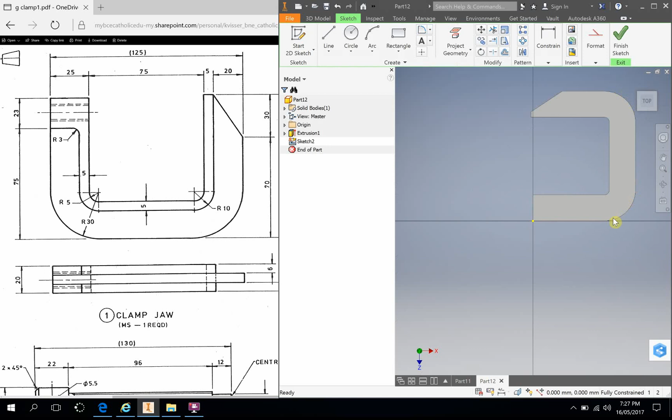So to start off, I'm just going to select that face and start a new sketch. And if I bring this over, what I might do is work in full screen so you've got a better view.

What I'll start off by doing is, with this here, I'm going to use a thing called projected geometry. So if I select that, I can click certain lines that I'd like to offset backwards. So I don't want to do the whole thing, don't click on the surface, just click on the lines you want to do.

So let's start off by just doing that line there, our internal fillet, and this line here. Now it's important, guys, that you don't do too many lines, so I don't need to offset that line yet. We'll just do this outside row to begin with, and we won't worry about the other little 23 by 25 block that's here.

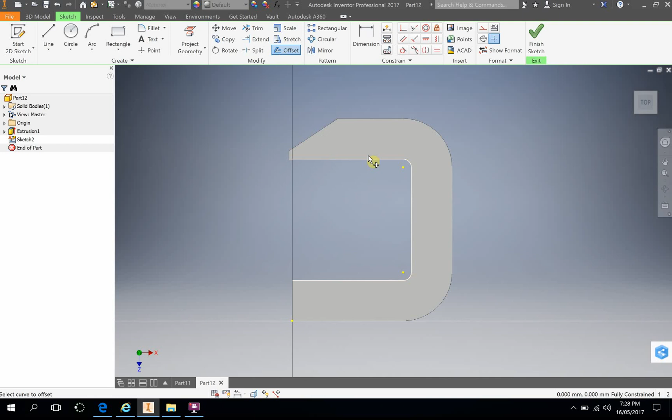So I'm going to start off and just go with my offset, which is here, and if I select that now, after doing the projected geometry, I should be able to type in 5 and click my little button here. If I flip this around, I just highlighted there, and we'll minimize this so we can see we've just done that 5mm part there.

If I was to try and close this shape, I need to draw from there to there, and it looks like from there to there, and I'm just going to quickly do that now. And I'll do another line from here to here.

Okay, I'm going to see if I can extrude this. This line here, I might need to delete it. I'm going to leave it in, hoping it actually causes a problem so you can see how to fix it. So I'll go finish sketch, and we'll go create and extrude. Oh, it is working. If that line caused a problem, simply delete it. So we know here that we need to go 6mm, so we'll change this to 6, and I'll click OK.

Right-o. I'm now going to select this surface again, and I'm going to go create sketch. You might be wondering why I didn't just project that line across as well to begin with and do this all in one extrude. The truth is that when I tried this before I started filming, I had a few problems with doing multiple offsets and multiple geometry commands all at once. So I found it way easier just to do this part, which is what we're trying to achieve.

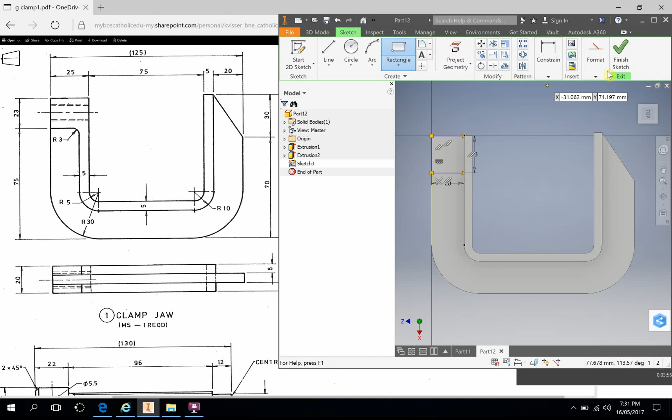That was a 5. By offsetting at 5, that turned into a 10. It all works sweet. Here I'm just going to go rectangle, click that corner, and I need it to go down 23, and I can just go tab, and that one is going to be 20, and there's the rectangle that I want. Finish sketch, extrude, that's going to be 6mm, done.

So I now have that surface there. The only thing that is missing is an internal fillet and the other side of it. So let's go fillet.

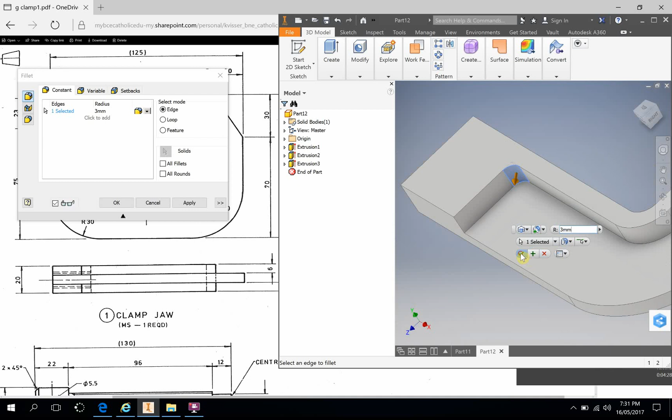We want that fillet to be 3mm radius. I'm going to zoom in and select that edge, and it's going to do it for me just like that. So the next thing I need to do now is to mirror this shape.

That's going to be pretty easy. I'm going to rotate it so I've got the surface that I want to mirror from. So that's going to be my center line, this surface here, and it's under pattern at the moment, and there's mirror. Let's see what options we've got.

So we've got features. Sometimes you can mirror just one extrusion if you wanted to, so you could say I just want to mirror that extrusion, not the whole thing. We want to do the whole thing, so we'll click on this, and now it appears that everything's been selected, which is great.

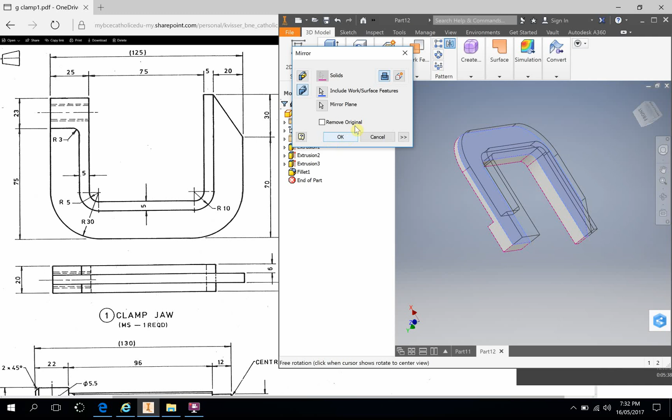Now the mirror plane, like I said before, that's going to be the center. So if I select that line, it's going to give me an example of what it's going to look like. From here, I can ask it to remove the one that I started with. You don't have to do that for this job, but you might want to. And it's going to join it, which is cool, and I'll just click OK. So that was pretty simple.

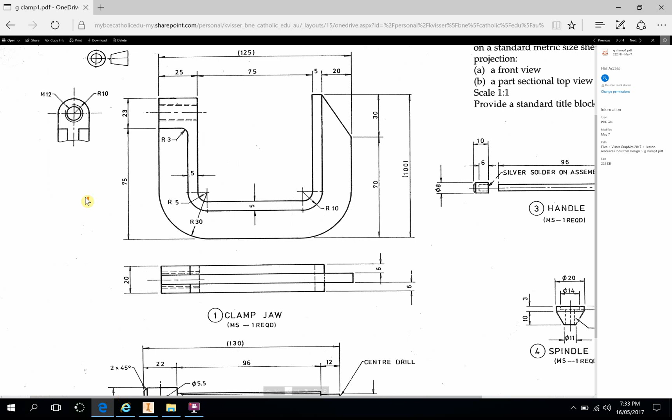That's pretty much my jaw done now. All you're going to need to do now, guys, is put a hole in here and a thread. I won't bother demonstrating that because you should know how to do that already. I will, however, come over here and just have a look at this dimension here to make sure we're not going to run into any problems.

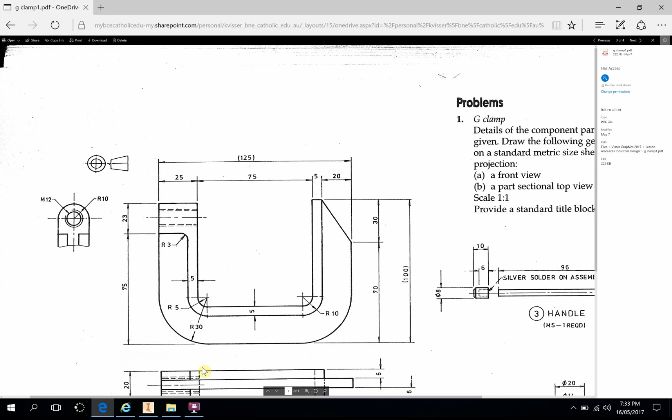So we need to put a radius on it, on the outside edge. I didn't think of that, so maybe I will quickly do this. It's going to be a 10 mil fillet on the outside edge, and a 12 mil hole, centralized, and because there's no other measurements, it's going to be in the middle of this distance here, which is 23. So I might pause the video, quickly do that, and then come back.

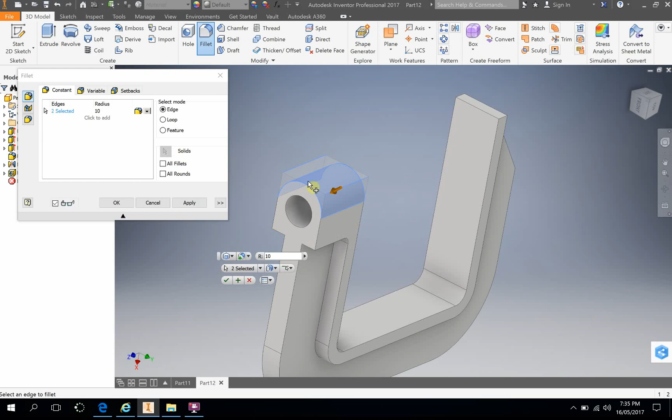Rightio, so there's my 10 mil radius. I'll quickly just show you how I've done this. Fairly simple, guys. If you select the edges you'd like to fillet, there's a shortcut there, or I can come up to fillet. Now I've already put in that I wanted a 10, so it's worked quite well, 10 and 10. I'll click OK. There's my radius there.

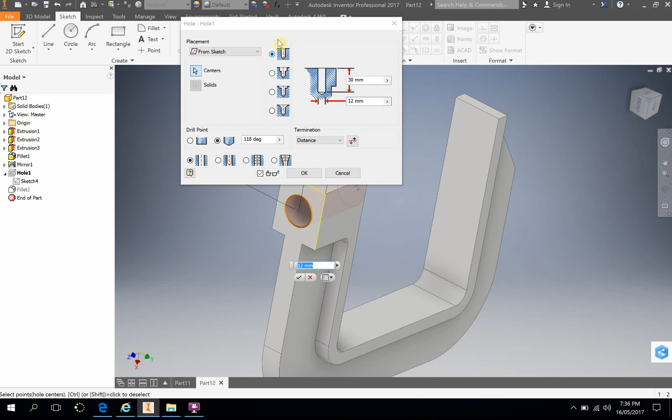To get that hole, all I simply did was I went to sketch. I actually used the little point feature again, and then I clicked on hole, and on that hole I went 30 mil just to get through it, with a diameter 12 for my thread, and clicked on this little thing here that makes it go all the way through. Pretty easy.

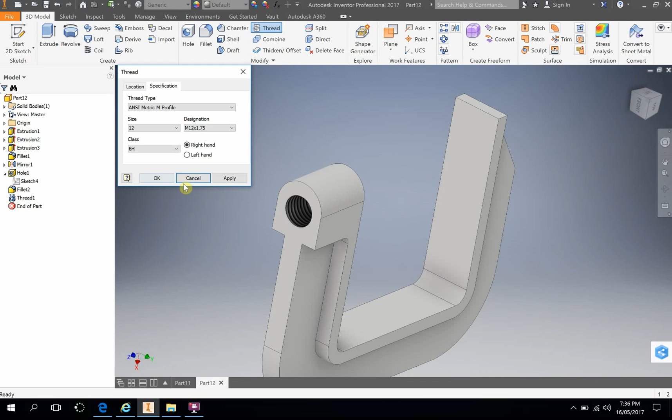Next thing I might even do is put a thread in here, making sure that it is M12 by 1.75 so that it matches my other one. Click apply. It's going to have a little thing about it again, and it looks like it's done. So I'm pretty sure that is completed now.

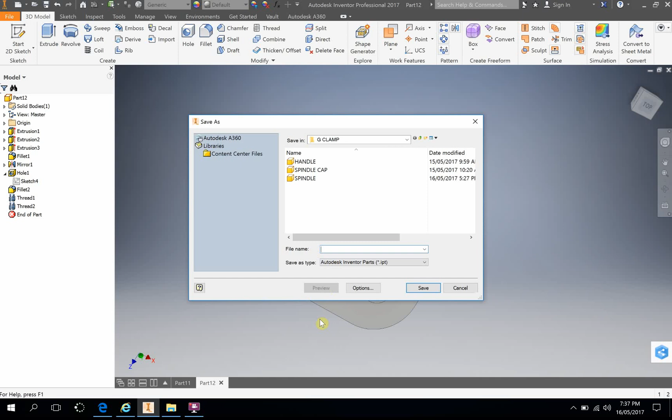So if I was to go in here and I'll go save, you can see that I've created a folder G-Clamp, and inside of it I've got my handle ready to go, my spindle cap and my spindle, and I'm just going to simply label this one. What are we calling it? We are calling it Clamp Jaw. Rightio, thanks guys.